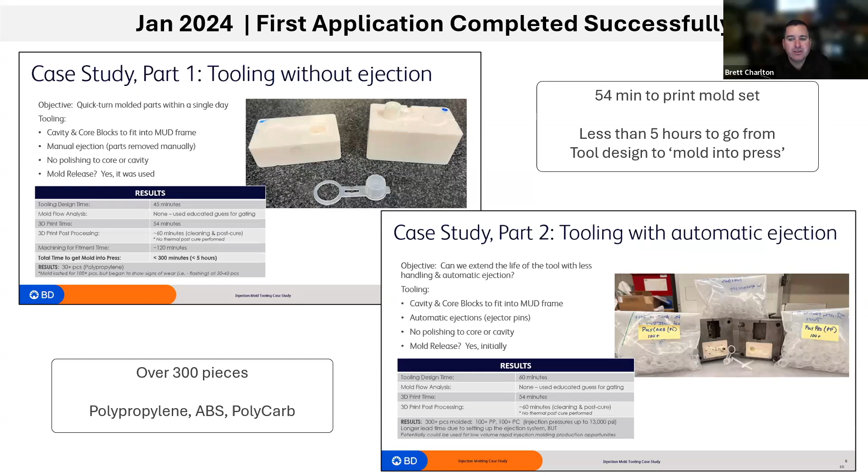You may recall that we've been on this journey with Axtra for some time now. Back in January, I had the opportunity to share a couple of case studies where we aimed to demonstrate how the Axtra3D Lumia X1 printer could revolutionize the tool-making process and truly put the rapid back in rapid prototyping. Rapid tooling is not new to our team. Our team has had the rapid tooling division for years. In fact, my manager was injection molding with 3D printed photopolymer materials more than 20 years ago. The significant breakthrough that we observed with these case studies was our ability to print molds in under an hour. These molds were accurate enough to be placed directly into the press with minimal processing or fitment and allowed us to mold parts in the same day. Additionally, we discovered that by taking a bit more time to incorporate automatic ejection, we could significantly extend the tool's longevity. If you missed that webinar, I encourage you to visit Axtra3D's YouTube page. Ultimately, our initial success gave us the confidence to move forward.

Talking about it is certainly fun, but sometimes seeing it is much more valuable. Here's the molding process from the aforementioned case studies. You can see the 3D printed mold tool halves already set in our MUD frame, and they're ready to mold parts. The part in question is a simple tip cap with a bottleneck loop and a living hinge.

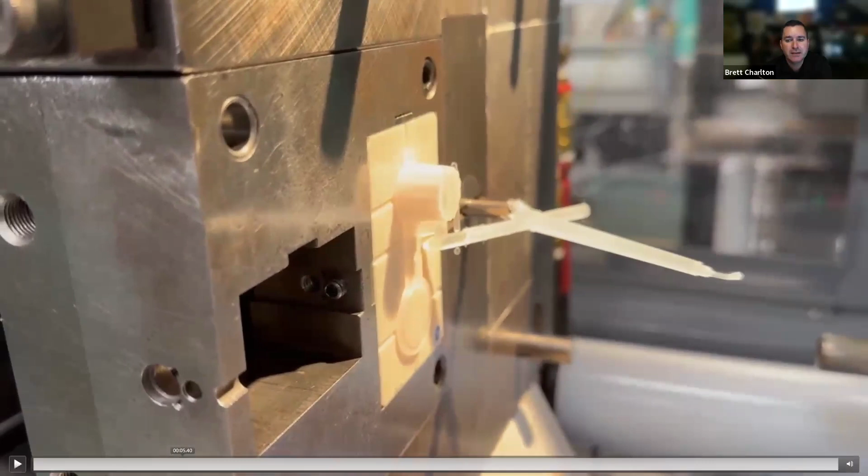The process begins when the mold clamps the two halves together, forming the cavity that the melted plastic will fill. The molds endure several thousand pounds of clamping pressure before and during the process while melted plastic is injected into the cavity. Injection molding involves high clamping pressures, high plastic injection pressures, air venting, high heat, rapid cooling, and then you rinse and repeat. And there you have it, a fully formed plastic part.

For those familiar with this injection molding process, you might have noticed that our cycle time is slightly longer than one would expect with a metal mold. This is because we are using a ceramic filled photopolymer mold for our tooling inserts, which, due to the brittle nature of the material, require a gentler, longer process to avoid fracturing the tooling components.

At least that's what we've noticed and observed with our own operations here with this material.

So what do I mean by rapid tooling? Well, the slide's title kind of gives that away. The opportunity to turn around injection molded thermoplastic components in a day, going from design to reality or physical parts, is the goal. But let's be honest, not every job is going to hit that target, nor does it need to. So let me redefine it slightly to say that rapid tooling is the ability to remove or minimize the largest bottleneck in the process, the fabrication of the tooling components.

Looking at the images here, the gap between image 3, the top right, and image 4 in the bottom left is usually significant. Depending on the complexity, the mold fabrication can take up to 6 weeks. I'm not suggesting that this mold would take anywhere near that long, but you certainly won't have the mold componentry available in 1 to 3 hours like you would with the Axtra system.

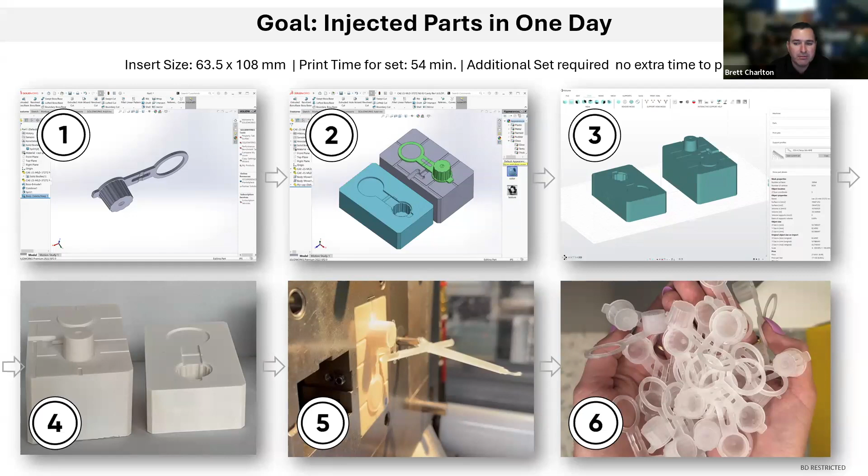Let's talk a little bit about the advantages of the Lumia system as we have seen them for our molding application. First, there is high throughput. Our case study allowed us to produce the complete mold set in under an hour. And if I had wanted to print another set, it would have fit right on the platform and not added any additional print time. It never hurts to have an extra, especially when you need to dial in your process at the beginning. To date, the largest mold set we have produced has measured around 5.5 inches by 6 inches in the X and Y.

By about 2 inches deep, that mold half took roughly 2.5 hours to print.

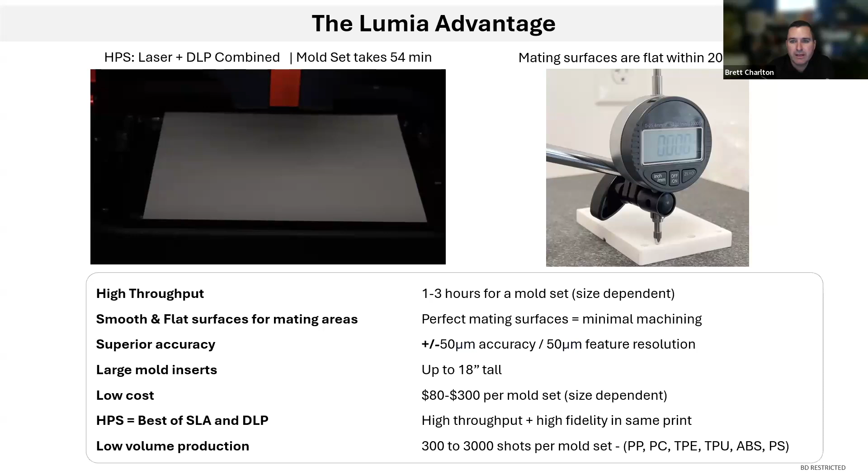So let's take a look at the imaging process of the Lumia system. Notice in the video how the laser takes less time to complete than a DLP cross-sectional image flash. The lasering process being faster than the DLP imaging means that the time driving the process is the DLP imaging, not the laser, as one might expect with the laser-based technology.

The next 2 items cannot be understated in the value of the system. The combination of glossy, smooth, super flat surfaces for the parting line and superior overall accuracy significantly reduce the time it takes to get the mold into the press. Let's take a look at what we mean by flatness.

You can see here that the surface maintains its flatness from front to back. The claim is within plus or minus 20 microns, but you can see here that the dial indicator is showing less than 10 microns or 0.010 millimeters from front to back on this parting line.

Historically, we've had to add stock to the parting lines and back surfaces, and potentially even other surfaces, and make other allowances that we would then machine away to achieve the appropriate stack height and fitment. With the Axtra3D system, we've been able to eliminate most of these secondary allowances as they are no longer necessary and only add time and cost to the process.

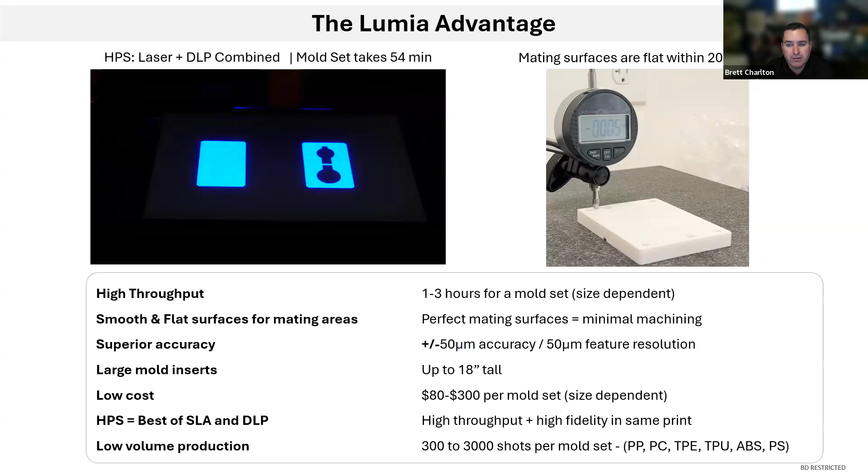When you combine all of the above, you develop a process that is ripe for rapid concept injection molding, and one that potentially could deliver a new option for low volume production with real injection molded thermoplastic components. We've seen upwards of 300 pieces in multiple materials out of our Axtra Lumia printed molds to date, but depending on material, you could get more. With the speed of mold fabrication accelerated, you can be producing a replacement mold while you're actively molding with the original.

Things have been moving along well since those early case studies, and while I cannot elaborate on specific projects and components that we've been molding, I can confirm that we have used the Axtra Lumia X1 to produce mold componentry for a variety of different projects and applications. That includes both with and without automatic ejection, flat and sculpted parting lines, tooling with multiple inserts, and some mold tooling as complex as a jigsaw puzzle.

Another area that we've seen success is in fulfilling the role of ejector plates. Historically, our ejector plates in the R&D space get used over and over for a variety of projects, and they eventually resemble Swiss cheese due to all the ejector holes that we've drilled into them. We've been able to retire many of those ejector plates with 3D printed ejector blocks specific to the project. They add little time to the print process and minimize the work our mold technician spends on the overall ejector pin fitment.

We have molded with a variety of materials, including polypropylene, ABS, polycarb, and polystyrene, and we've also molded with multiple elastomers, which I'll touch on shortly. We've also produced the largest 3D printed mold sets that we've ever attempted with a photopolymer mold, with success.

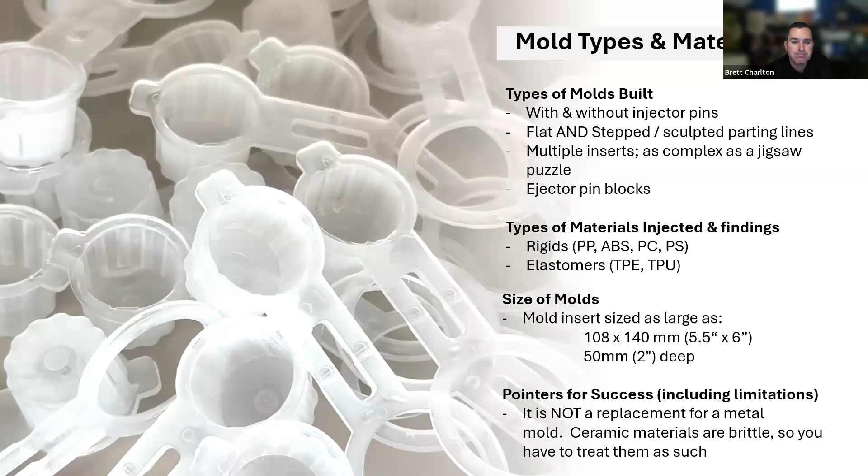I lightly touched on elastomers on the previous slide, and I'll lightly touch on it here. I wanted to highlight that we have had success molding various TPEs and TPUs across a range of durometers. When working with elastomers, you might be surprised by how many successful shots you can produce with a single mold. This is primarily due to the ease of part ejection - softer materials are more pliable and less likely to fracture the tooling during the ejection process.

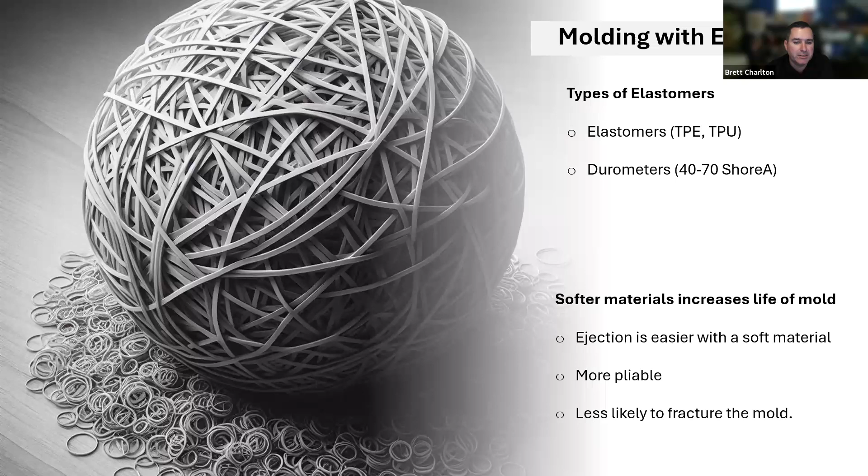Regarding the success factors of the Axtra Lumia X1, many have already been highlighted. The system prints with exceptional accuracy and delivers on its promise for speed. The HPS process results in smoother sidewalls, which aids in part ejection. Additionally, the mold components produced by the machine have a glossy, smooth, flat parting line that, combined with its precision,

significantly reduces the extra work required for fitment, leading to cost and time savings. In all honesty, before discovering this application with the Axtra Lumia X1 coupled with the BASF material, we had essentially given up on producing molds using SLA or DLP processes for a myriad of reasons. SLA molds typically take around 16 to 24 hours to produce and required extensive post-printing adjustments for proper fitment. And the materials available to those legacy technologies often yielded only a few usable shots before failing.

We have also attempted to use our DLP printers by leveraging a handful of our high heat deflection materials, but we ultimately ran into issues. Those issues included trouble with thick cross-sections starving or just not forming during the print process, or warpage or distortion of the thick cross-sections from the print process, or if we managed to actually print the tooling successfully, the materials were overly brittle for the injection molding process, leading to immediate failure.

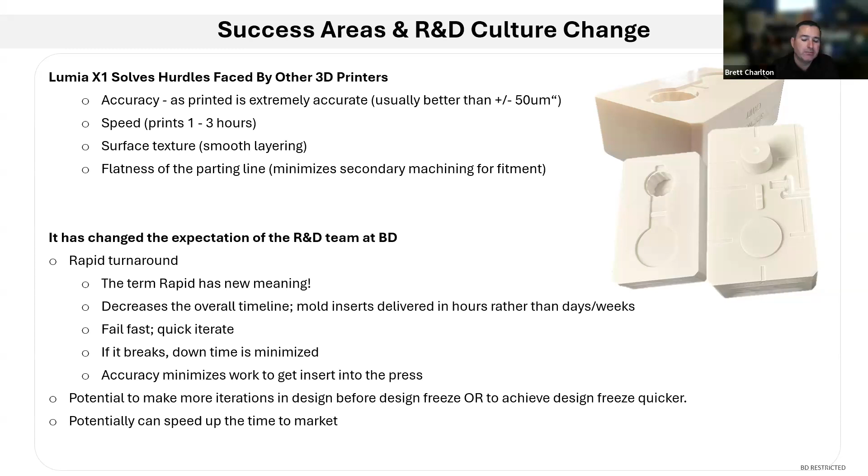So the innovation has transformed our approach at BD, especially in R&D. Rapid now truly means the potential of going from concept to molded parts in a single day. It allows for quick failures and rapid iterations. If a mold breaks, a new one can be printed fairly quickly. And this means that engineers can iterate more frequently or achieve design freeze faster, ultimately reducing that time to market.

You might be wondering about the criteria we used to evaluate the Axtra system. First, we assessed the system's accuracy across the print envelope. And we're pleased to find a consistent precision of plus or minus 25 microns in the XY plane, which was better than what Axtra was actually claiming.

Next, we compared SLA and DLP printed components versus those printed with Axtra HPS technology. Hands down, the HPS is faster than SLA, and it delivers a similar sidewall quality. When it came to comparing HPS versus DLP 3D printing, we were happy to see that the print speeds were similar. And while not all parts printed on Axtra showed a visible difference in sidewall quality to the naked eye when compared to DLP technologies, they were always comparable, and in many cases, we did actually deem them superior. So we also confirmed the system's capability to achieve the advertised 50 micron minimum feature size.

Our decision to partner with Axtra was based on a handful of criteria. First, there was part quality and accuracy. One thing that my manager has always pressed upon us is that beyond anything else, a machine must produce good parts. But what does that mean exactly?

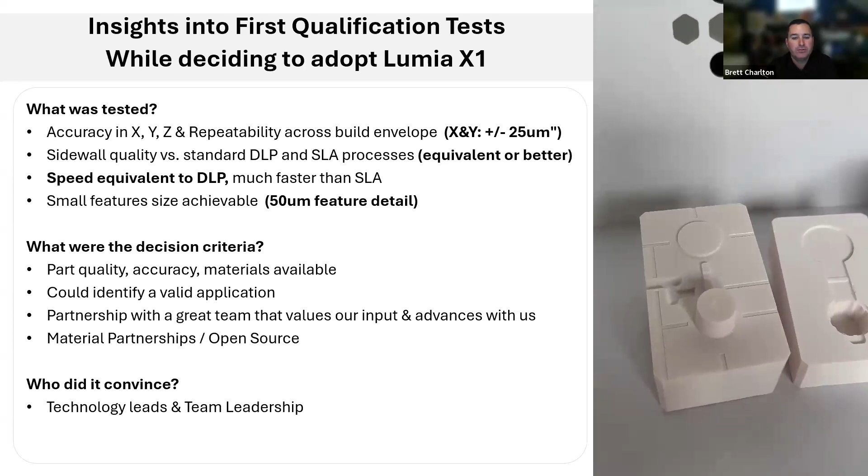All right, well, that's it for today. I hope you have found this time together enlightening and valuable. It's been a pleasure to discuss BD's value proposition for why the Axtra3D Lumia X1 has been successful in our R&D space. You can see a few of the value propositions highlighted here. Thank you for your time, and I'll turn it back over to Meredith for some Q&A.